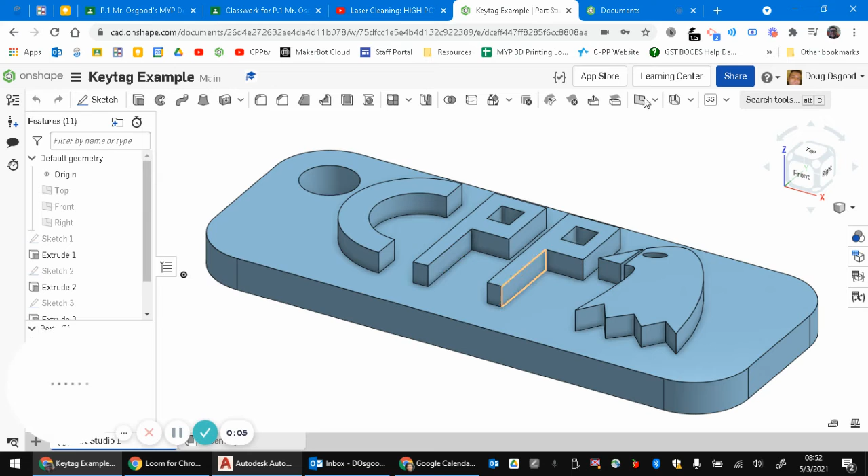Hey there, everybody. This video is going to show you how to make a key tag kind of like this one in Onshape. This key tag will be one that you can get printed out and sent to me. This is going to be a cool opportunity for you to get something and get your hands on it and just see what happens if you 3D print something.

There is no right or wrong for this. Your goal should just be to get something printed so that you can hold it in your hand, even if you don't like it. Do it anyways, and if you don't want to keep it because you really don't like it, that's totally fine. But it can be really awesome if you strive to make something that you're going to want to keep.

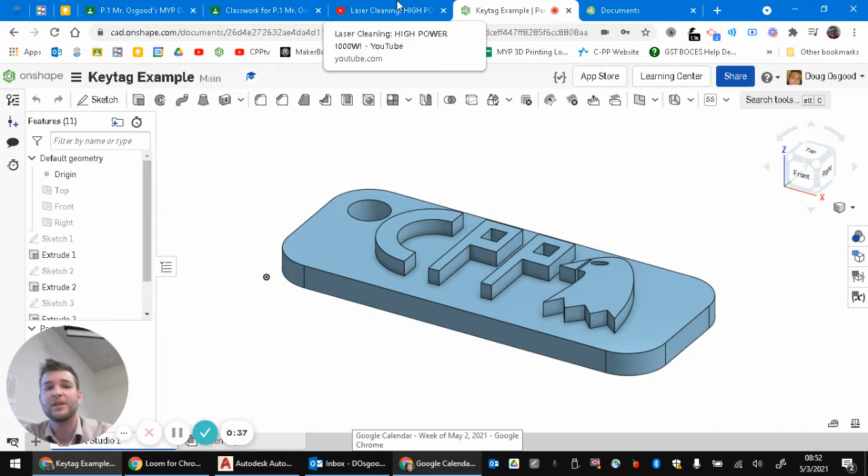So this is a set of plans that can work really well for you. This is just some suggestions. You don't have to put the words 'test' on it. You don't have to have a little picture of a hawk over here if you don't want to. The goal of this is really just to make something that you can have 3D printed.

This is a cool, small little thing that's easy to do, and it'll be fun for you to work on. I'm going to operate as if you haven't done this before at all, that you haven't even extruded anything. I know we did an activity about that, but this should work for anybody who wants to work on this. If you feel like you know some of the stuff, you can skip ahead with the arrow keys on the keyboard.

I don't need to teach y'all how to use YouTube. You already know how to do that.

So we can make a new document. I'm going to turn on my mouse clicks here so that you can see what I'm clicking on. So if I click somewhere, it makes a little gray circle.

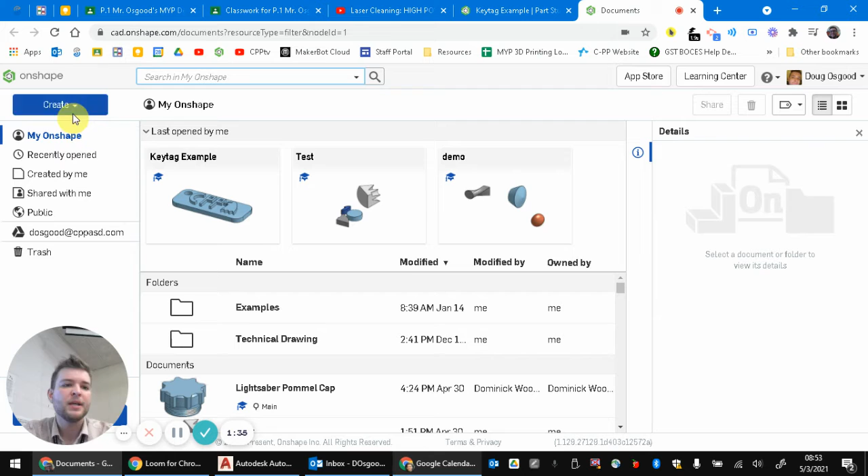I'm going to go to create, and make a new document. I'm going to call this Keytag, calling it demo because it is a demo, and I have a lot of Keytag demos saved in my documents. Then you can hit enter or click the blue button there.

As you might remember from the Onshape exercise, the Onshape intro activity, the playing around in Onshape assignment, if you did that—if you're looking at this video another time, you might not have done that—to make a closed shape, we have to make a sketch.

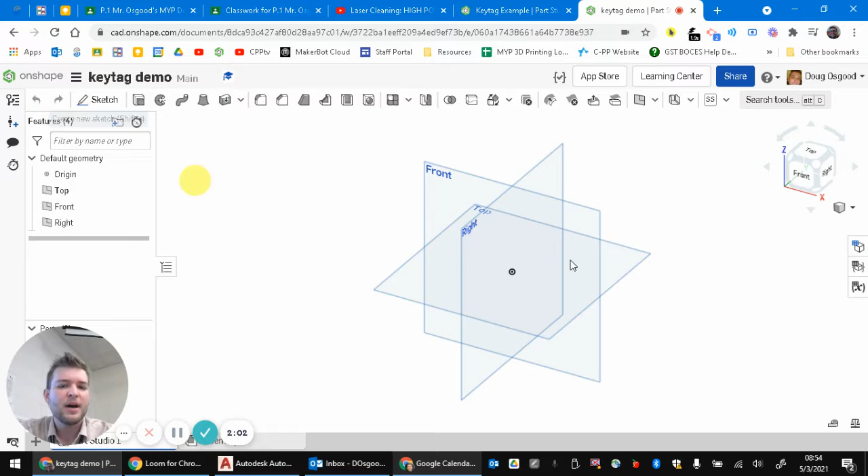So I'll click the sketch button. We have to select a sketch plane. I'm going to pick the top plane near the edge when it lights up and turns orange. And then we're going to draw a shape.

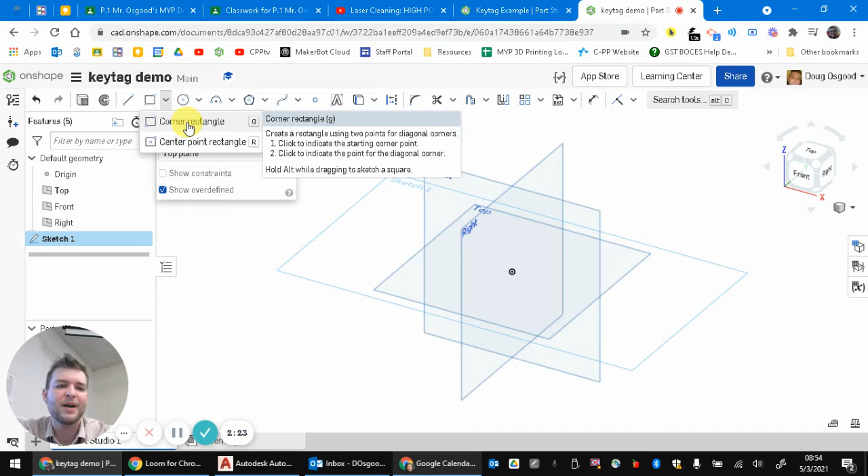Now this time we're going to be using some dimension tools, so you'll see how that works. I like to use the corner rectangle, which you may have to click this little drop down and pick. This lets you pick the first corner and the last corner of a rectangle.

So I just clicked on that. I'm going to start it on this middle origin point, so I'll start it there and make it come out to here. And look, I didn't care about the size yet. We're going to come back and look at the sizing later.

So now is when we're going to look at the size. I'm going to say, alright, I want this to be 50 wide by 20 tall. So to do that, I can click the dimension tool.

If you can't find this tool, you can push D on your keyboard like it says in parentheses, and it'll turn it on and off. So I'm pushing D over and over. Or you can click on it to turn it on and off that way. Or you can even go and search here and search 'dimension.' DI usually gets it, and that'll turn it on and off. DI, enter, and that'll find it for you.

To use the dimension tool, which you'll use all the time in here, you click once on a line, move the mouse away, and click a second time. That could be two clicks, and the second time stamps the number down. We said this is going to be 50 wide, so I'll type 50.

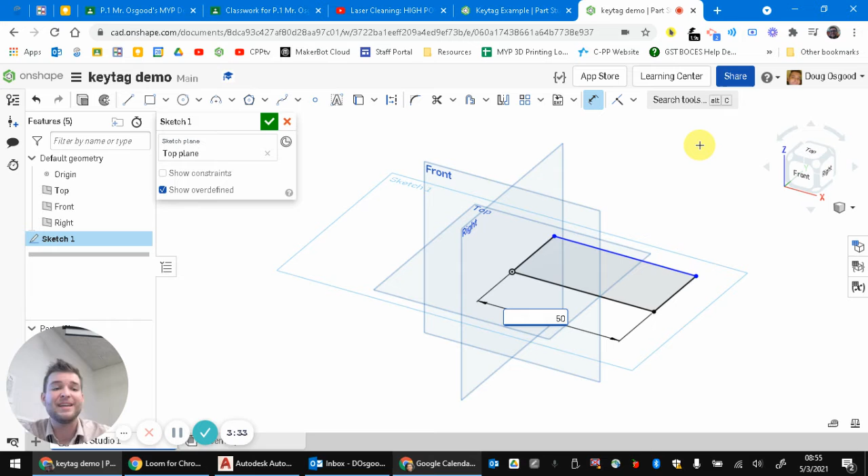You'll usually know what units you're in if you go up to the hamburger menu and click workspace units, and it should say millimeters. If not, you can change it and click the check mark. I left the sketch when I did that, so I had to double click to go back into it.

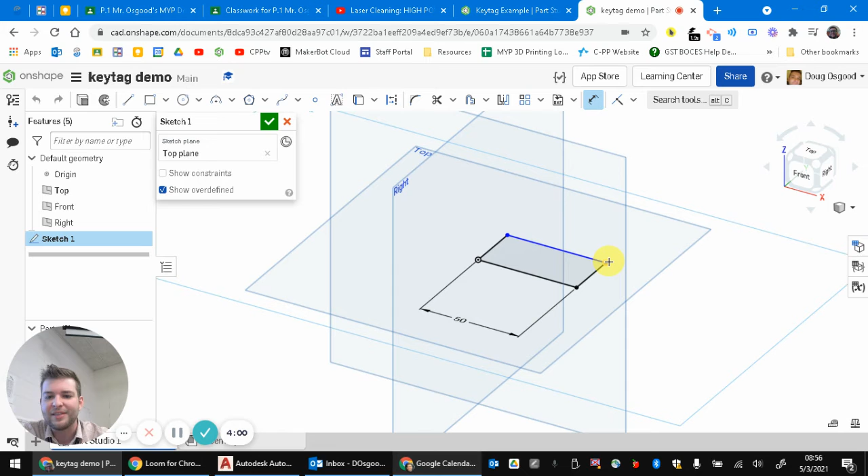I'm going to dimension the top part, and I'll show you a different way to do this. You could click on the line, or click on the start and end of the line. That's a click on the start, a click on the end, and then a third click to stamp it down. So you can either click a whole line, or click the two ends and another spot to stamp it down.

We're going to make it 20 tall. That matches my size here. Yep, perfect. I'll click the check mark to accept that.

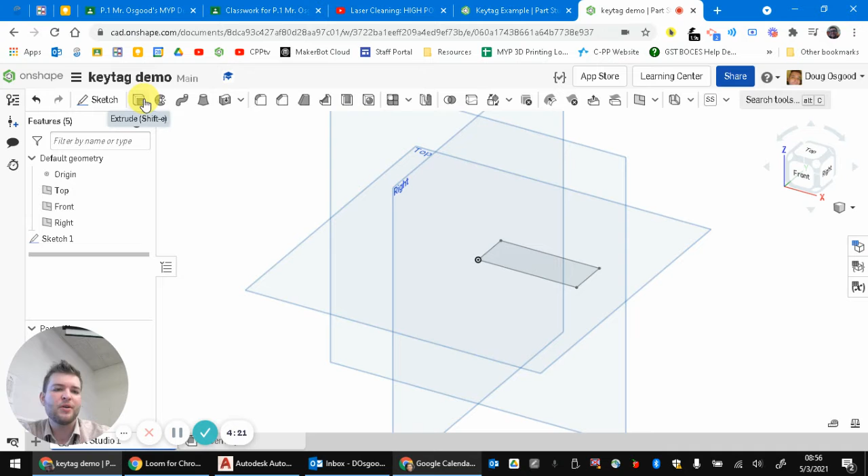Then I'm going to use the Extrude tool. If you did the Playing Around in Onshape activity or another intro activity, you should already know how to do this. I'll click on that, then click on the shape. It's going to extrude. Let's check our plan to see it's 3 millimeters up. I'll type 3mm, hit enter, and click the check mark.

If you have any questions on any of this stuff, ask for help, of course.

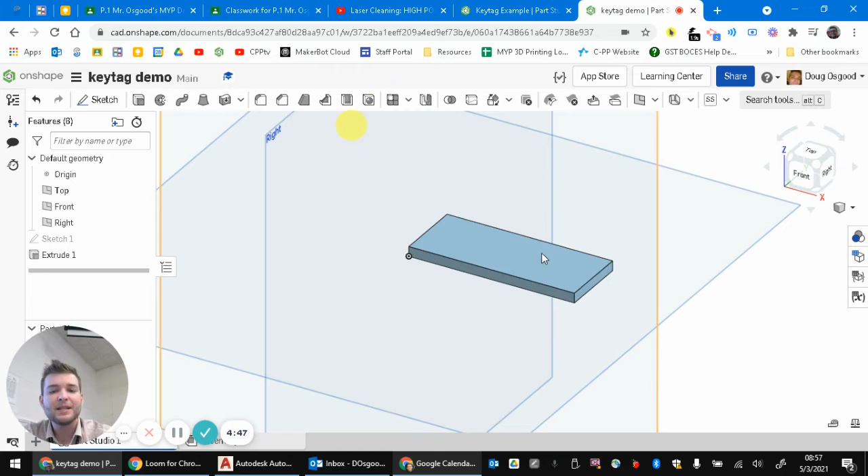The next thing we're going to do is create another sketch on top of this to make the lettering or whatever shape you want. You don't have to do letters, you don't have to do a shape — you can do one or the other. It doesn't matter to me.

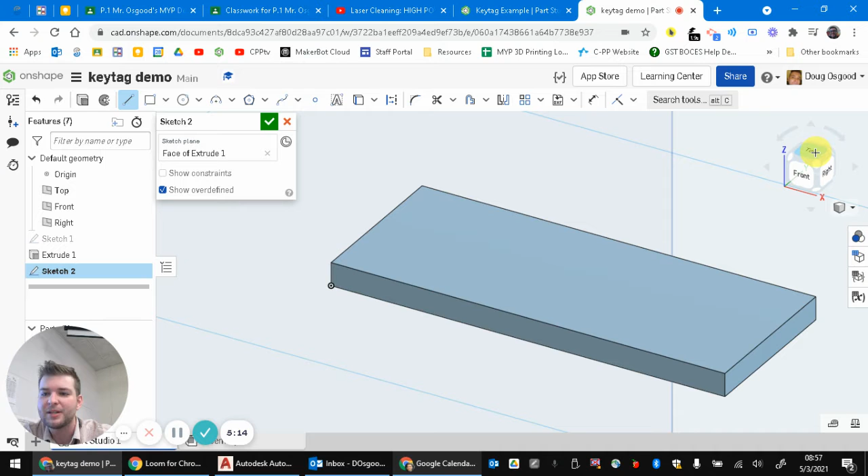So I'm going to click sketch, hover until the top of this lights up, and click again. Then I can start drawing, and you'll see it draw on top of this face. If I wanted to do my initials, let's look straight down — I'll click on the top of the view cube here.

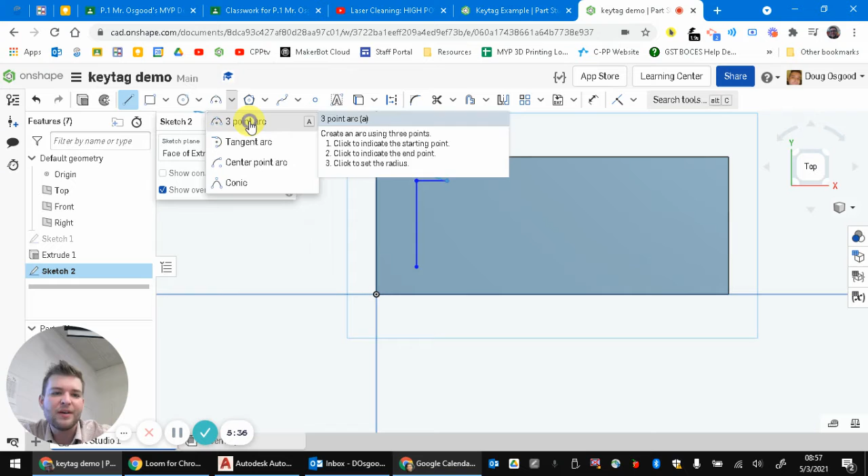My initials are DRO, Douglas Richard Osgood. I can click, go like this, come over here. If you want to switch to the arc tool, you can go up and grab it. Sometimes the arc can be frustrating, so you have to play around with different things, but we could go like this, and then click again to place that middle point.

So you just play around with these tools — the whole goal of this is to experiment and see what you can do. That's going to create a D, but it doesn't have an inside and an outside line, so we have to add one. I'll turn off my line tool.

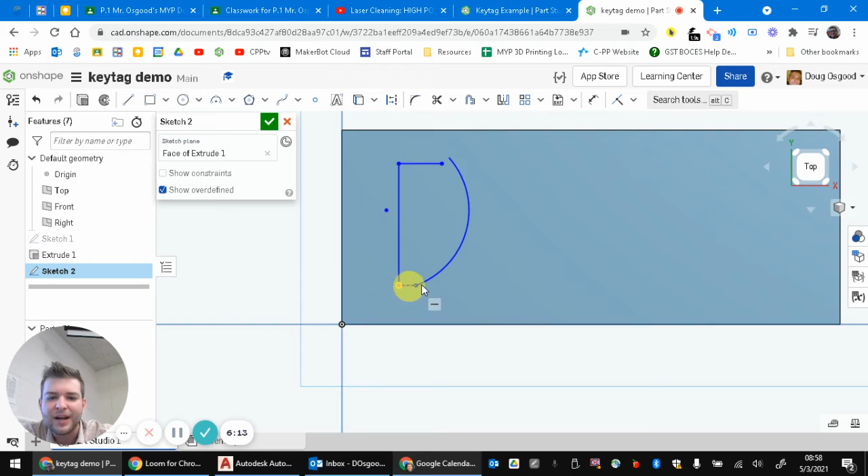I can get in here and adjust these. Maybe I want to make it line up with that — I hovered over it and brought it down like that. Maybe I want it sticking straight out so it lines up with this. Ooh, look at that, that looks really nice. Yeah, now things are centered.

To create the inside part of this, I can go up here and use Offset. I'll click on that — this lets me pick a bunch of lines, and it's going to offset them a certain distance away.

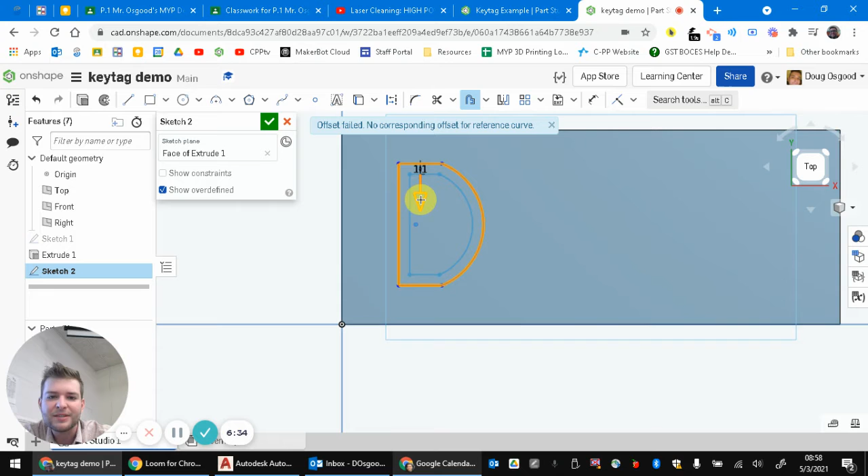Now we're not seeing lines, so I'm going to drag this arrow slowly until it gets a little closer. And now I can start to see a measurement appearing here, a dimension, 1.1 millimeters.

Let's check that plan for a second. Oh, I don't give a size for the size of this, so I would just say do it until it looks about right. I got too many tabs open here, people. There we go.

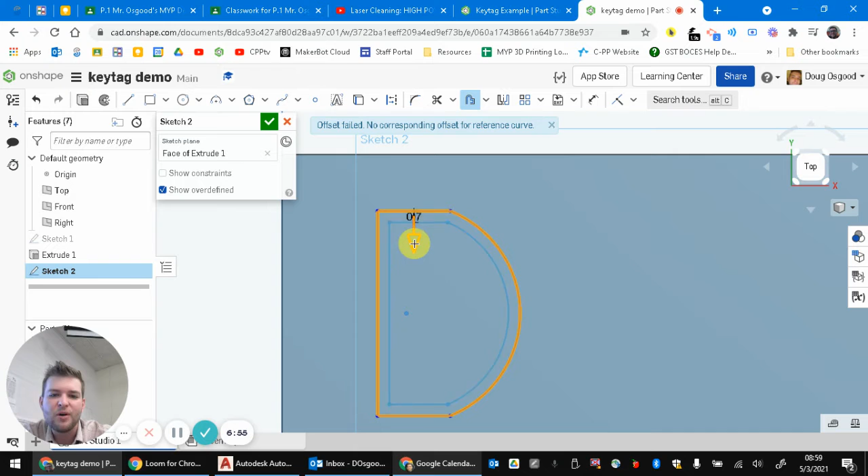You can drag that until it looks about right. If you don't want to try to drag it till it's perfect, just click over here in empty space, and it'll automatically let you start typing that number. Let's make it 1 millimeter. That seems good. And then I can go through here, and I can do that for all the other letters.

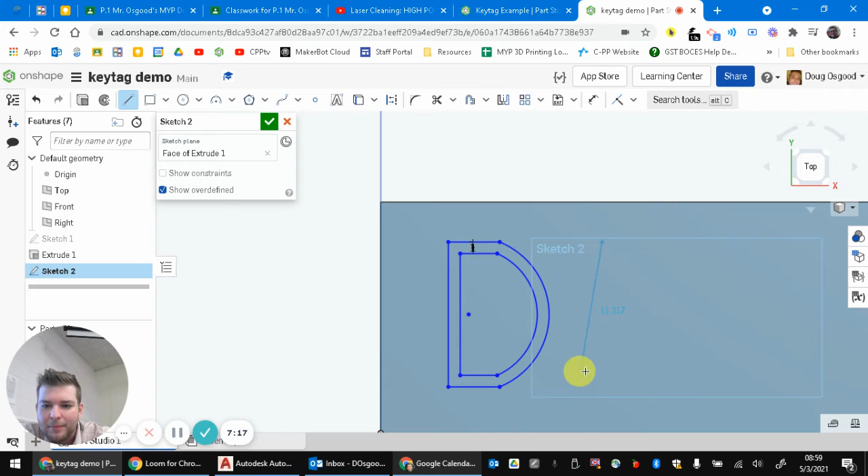So let's do an R. Actually, let's do this. You might have noticed you can hover over these dots to start things so that they line up. If you go like this, it'll snap with a yellow dotted line so that it lines up with other things around it. So let's go like this.

I'm just going to draw the outline of the R this time. So we'll go out here. Let's go like this maybe, and then we'll come up. Oh, we can't get, oh, there we go. They're going parallel to one another.

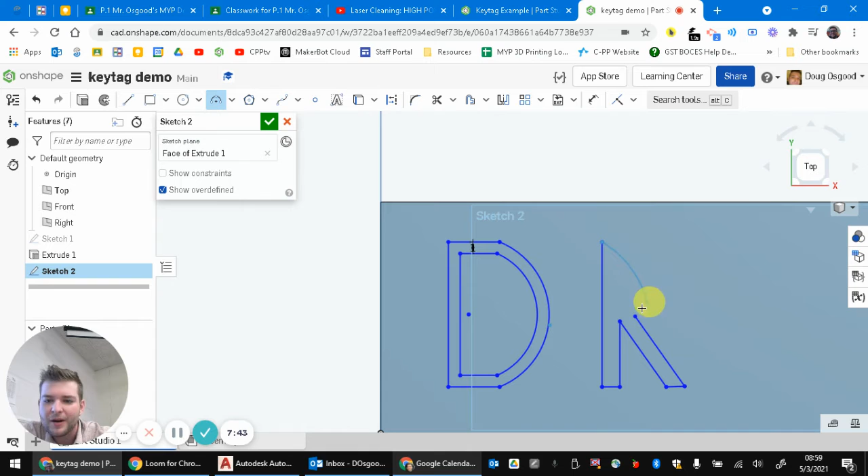Maybe I want to turn this off and pick up the arc tool to do this part here. Like I did before, move that around till it looks right.

All right, and then we could use that offset tool again. And we could click on this, and we can drag this in like that. And click somewhere else to set that distance. Let's make it 1. So if things don't look quite right like the way you want them to, you can go in here and you can fill in the blanks.

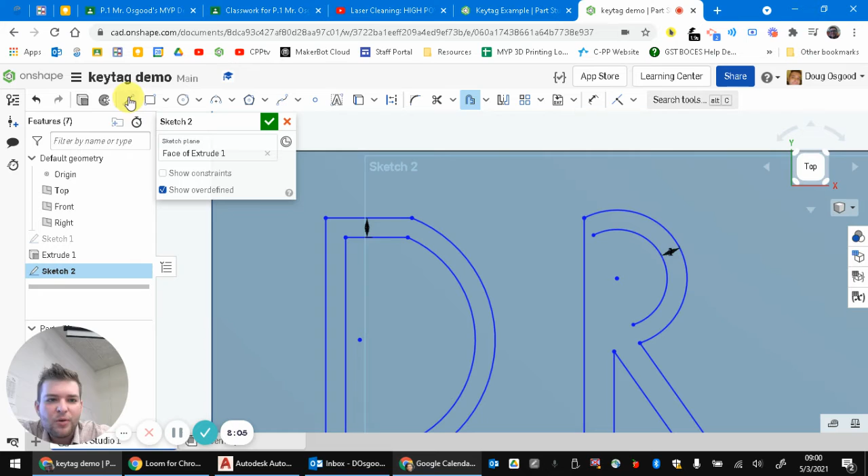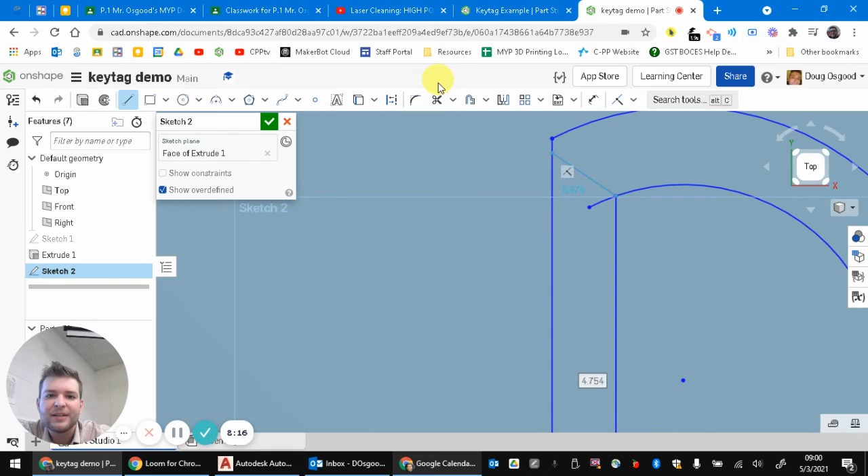You can even use, if I snap this onto there, if you want to get rid of this little dangly line here, you can use the scissor trim tool, and that lets you click on lines to trim them away. So there's tons and tons of ways that you can manipulate these lines.

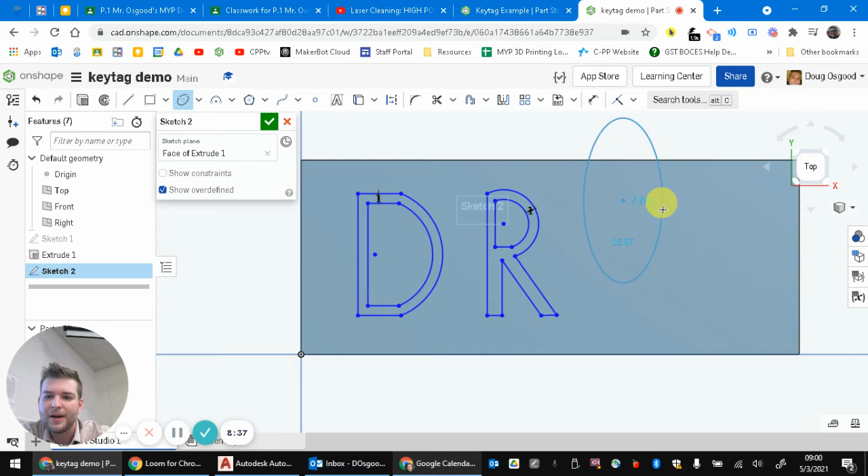Like I said, I want you all to just play around with this. Maybe for the O, I'll do an ellipse. So this lets you pick 2 points like that, a center point, a wider spot, and then a less wide spot here. And then I could even do another ellipse inside of that, or I could use that offset.

I'm going to use the offset tool again. I hit escape to cancel that command. So we go here. Let's drag that arrow to get it going towards the inside. We don't want it to be too big, or it'll give us an error like that. It doesn't always like that.

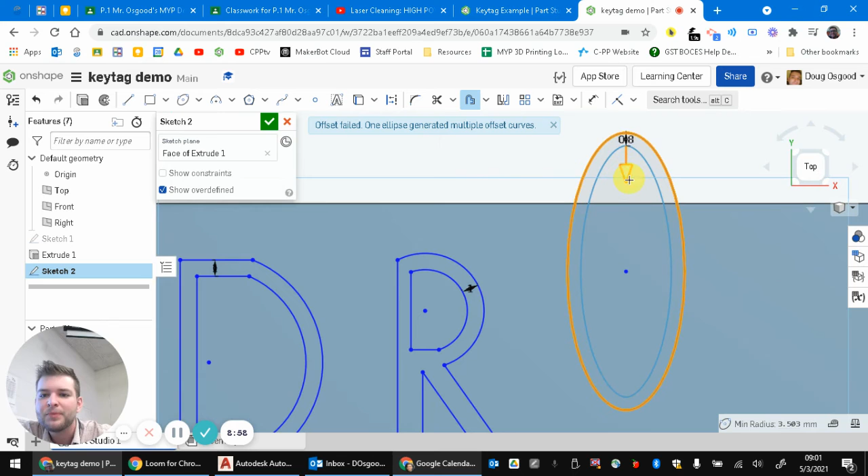Let's click somewhere else. Let's make that 1. Cool, I don't really like the shape of this. So let's see, can I drag it? Yes, I can drag it to change the size of it.

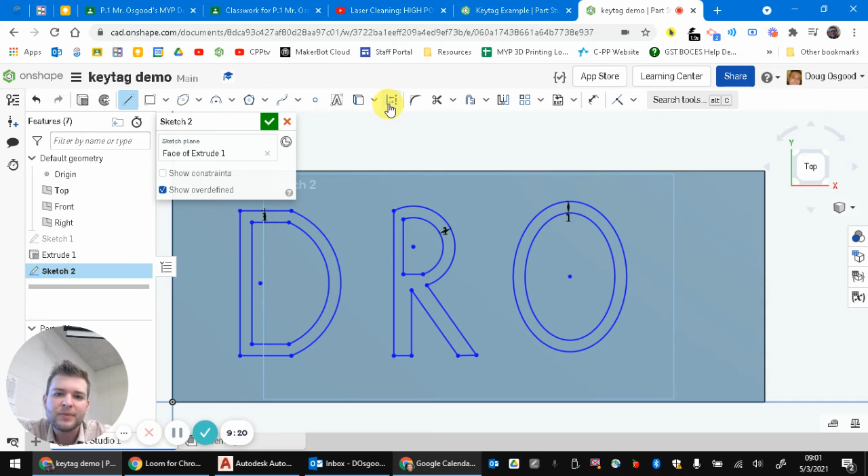Let's maybe make it a little more smushed this way. I can drag it by its center point. If you wanted all these to line up, what you could do is you could click the line tool and click the construction button. And this will give you a dotted line, which I'm hovering over that point so that it's going to line up with the middle of that.

I could draw a straight line across here, get it so it snaps so it's perfectly horizontal. Click a second time for that line. And now let's turn off my line tool and my construction tool.

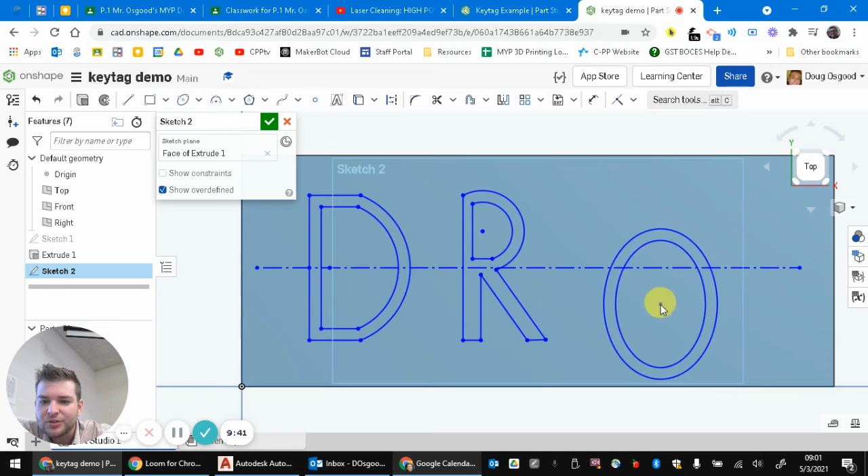I can drag this O so that it sticks onto that spot, and I can do some things like that. Like maybe I want to drag this R so that that sticks on there and so that this sticks on there. And then maybe I don't like how close that is, so I want to adjust that. And you can totally just play around with this until everything looks right.

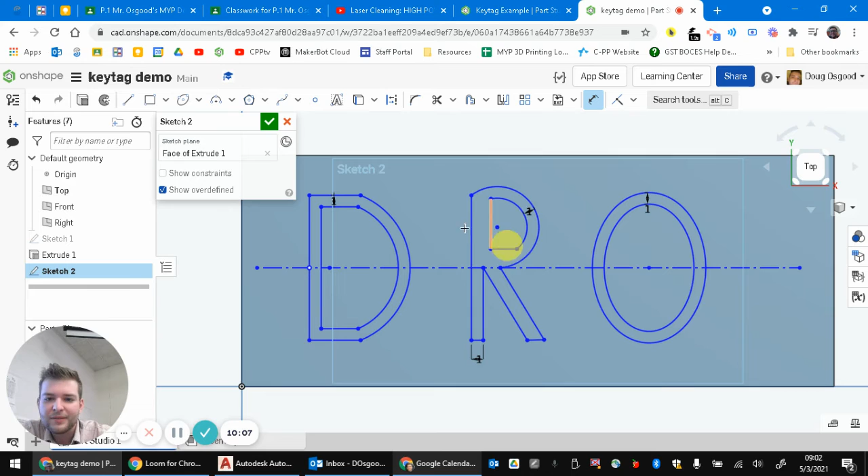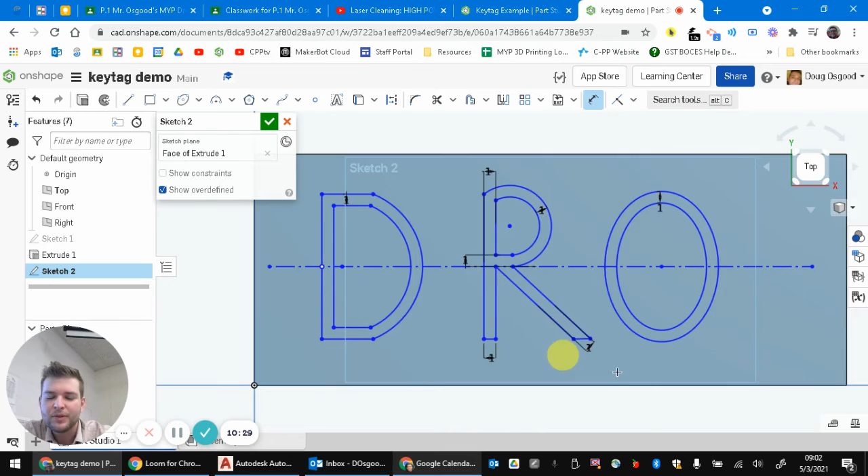And if you wanted to dimension other things, like maybe I want to make the distance from here to here 1 millimeter. Okay, that made things look weird. You got to be careful if you put too many dimensions, it can cause problems. The only way you're going to find out if things work is to try it and see. You can always hit undo. Ooh, that changed the angle. All right, let's roll with it. That looks pretty good. Check mark.

Okay, I spent a long time on that sketch, so hopefully you skipped it if you didn't need it all.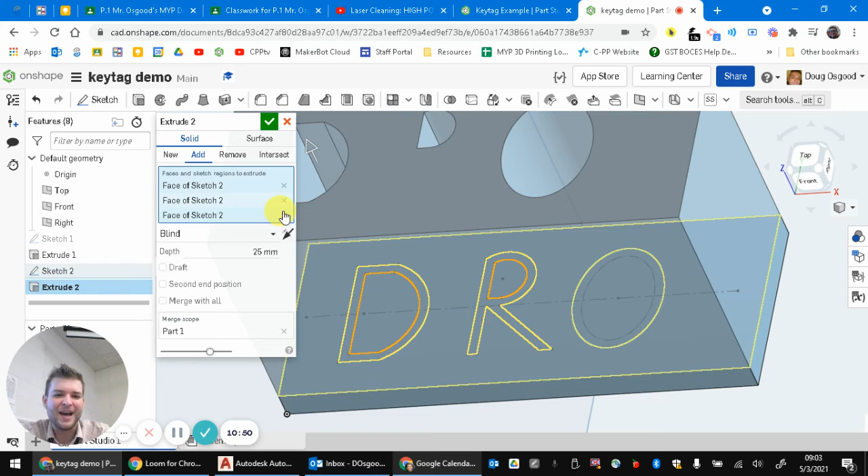I'm going to do extrude. I'm going to hover around until each of these shapes lights up. Just the middle. If you do the outside, watch this, it's going to mess everything up. That's not what we want. So you can click the X up here for the last thing you picked, or you can unpick it by clicking a second time. We'll click there.

Cool. We could stretch these down, or we could type a number in. I think the distance, I have them popping up in the drawing on the other page here, is 1 millimeter. Yep, 1 millimeter. Click the check mark.

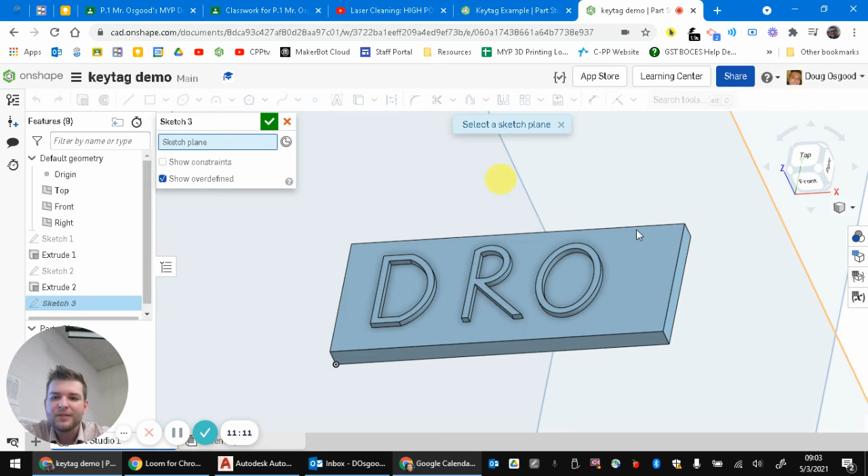And then you can add a hole by sketching again on top of this, drawing yourself a circle. I'll give you some dimensions for that hole: 5 millimeters from one side, 5 millimeters from the top, with a 5 millimeter diameter.

So let's use the dimension tool. We'll click on this point and the middle of the circle, 5 millimeters. Let's click on this side and the middle of the circle, click again to place the dimension, 5 millimeters. Let's click on the circle outside, click again, 5 millimeters. Set the size, check mark, extrude.

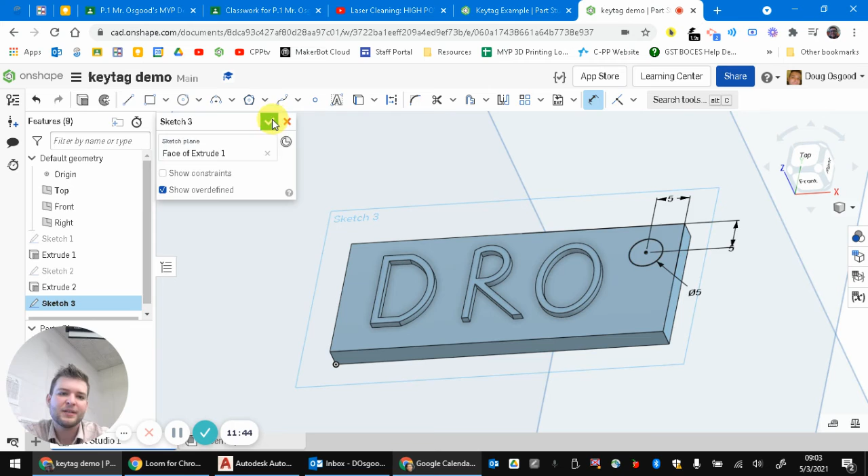And this time we'll click on it and we'll do remove, and it'll remove that circle there. Click the check mark. What we could have done too was, while we were working on that, change this to through all so it just automatically went through everything.

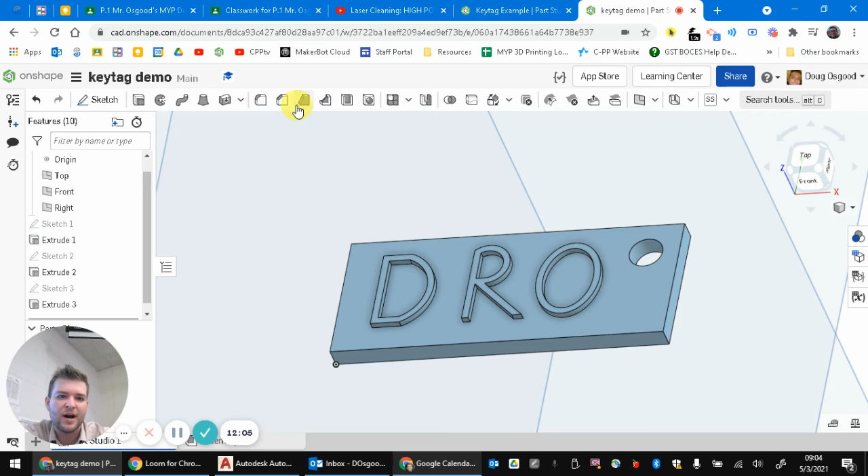And the last thing to really make this look nice would be to fillet the corners. So I'll click this, and this lets you click on edges that you want to sort of round off, like you're sanding them away. So we'll click on the 4 sides. And you can drag this little arrow to change the size, maybe you want it more extreme.

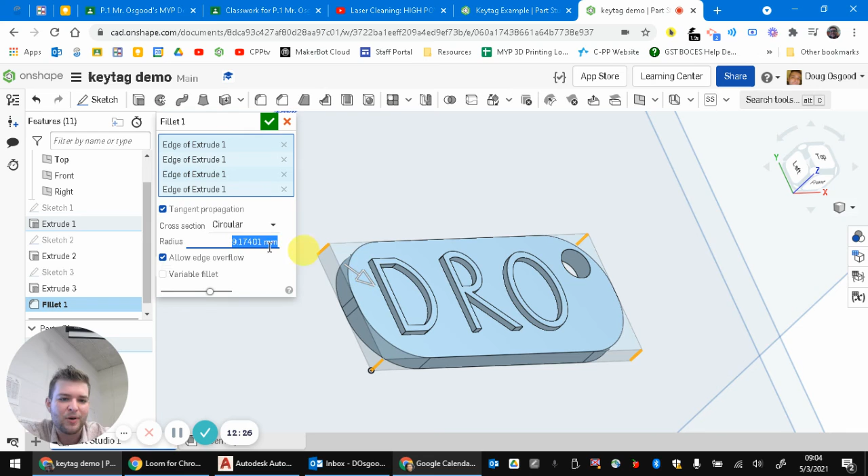If you go too far, it crashes and it turns red and it doesn't work anymore. Or you can just type a number in here, like we could do 5. I think over here I have it set to, yeah, 5 right there is the radius of that. So we'll put 5, check mark.

And that's pretty much it for your key tag.

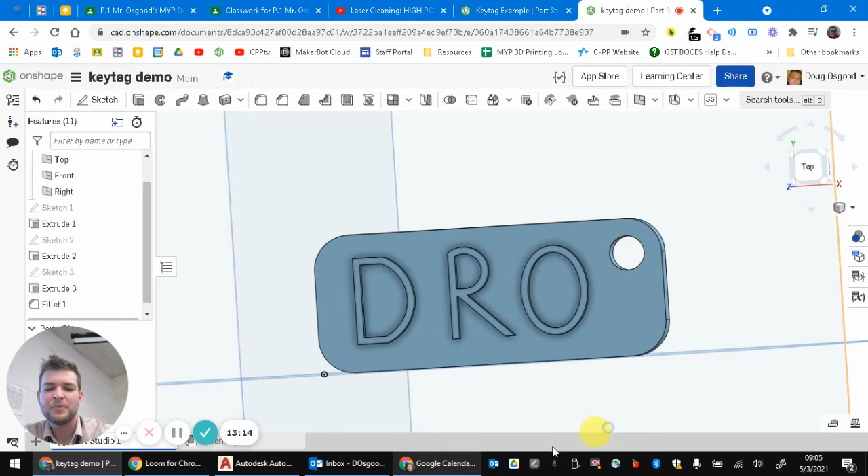Any other things you want to do to this, feel free. You can always go back and edit these by double clicking on any of the sketches. You can change the size of the extrusion by double clicking on the extrude. There's about 1,000,001 ways you can do this. So play around, have a good time, people, and make something cool that you can hold in your hand.